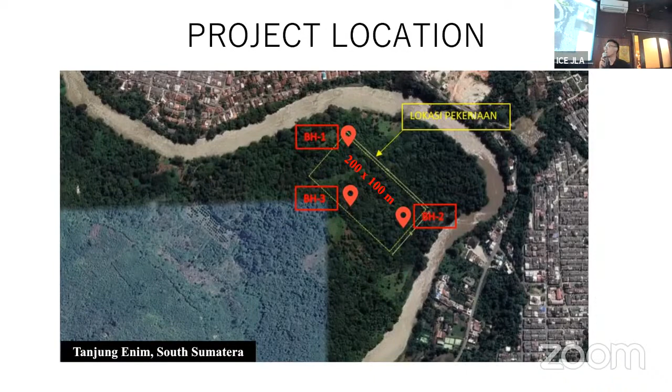For the introduction, the project location is at Tanjung Enim, South Sumatra, where the area of improvement is 200 by 100 meters. They gave us 3 boreholes with the NSPT value and some undisturbed samples down to a depth of 17 meters, as well as disturbed samples.

For the project requirements: first, we want to build an embankment of 2 meters, so the design level is 2 meters, and the whole stockpile itself will be 10 meters high.

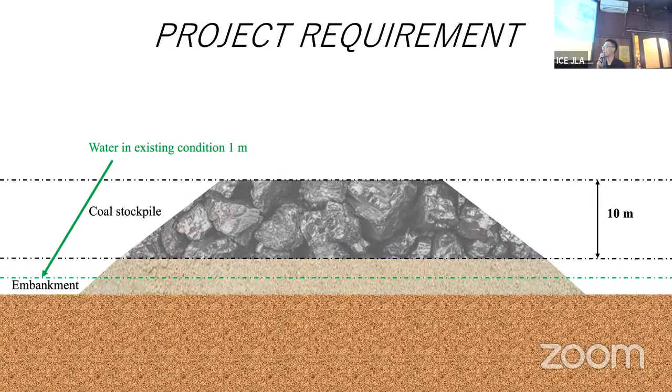So the total load from these two is going to be about 160 kilopascals, equivalent to 16-story buildings. In the existing condition, it's already submerged in water as deep as 1 meter, and in the flood condition, it can reach about 1.5 meters.

There are also other requirements such as the factor of safety. In the static condition, it has to be at least 1.5, and in the seismic condition, at least 1.1. Other than that, after we build the stockpile, the settlement limit is only 20 centimeters, which I think is the most challenging part in this competition.

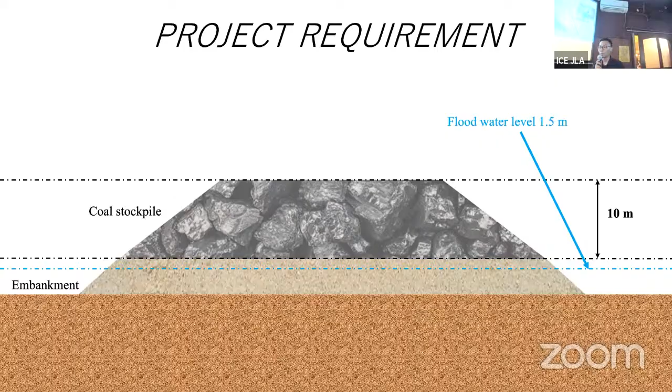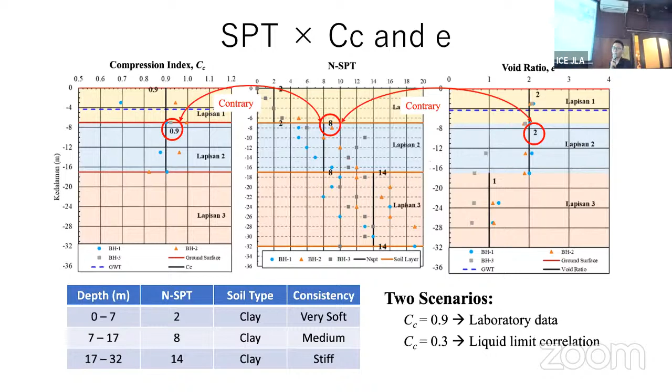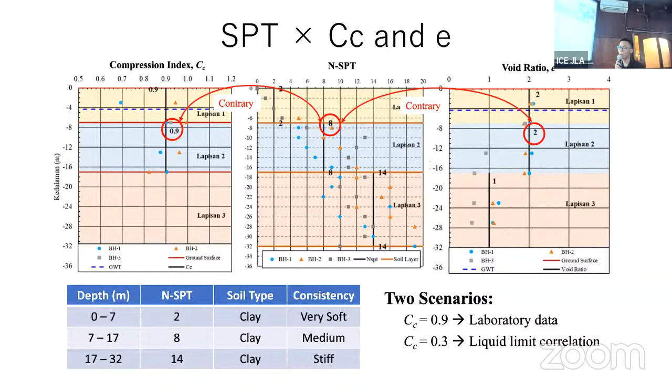So in the end, we designed 2 different scenarios. The first one uses the laboratory data, with a 0.9 compression index, and the other one is from liquid limit correlation, which has a lower compression index value. We want to show how soil data can really affect our design in the end.

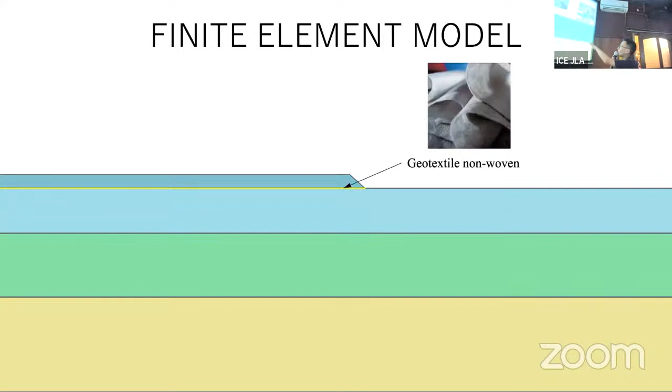Next, we model the design in the finite element program, which is PLAXIS. First, we have to define the soil layer, and then build the working platform, where we also lay out some geotextile nonwoven as a separation, and then we can install the prefabricated vertical drain to accelerate the consolidation time.

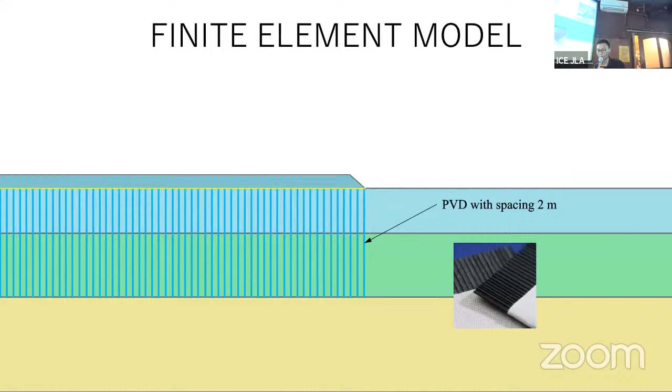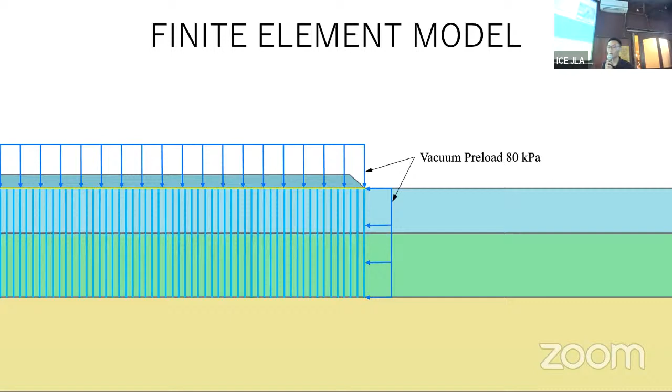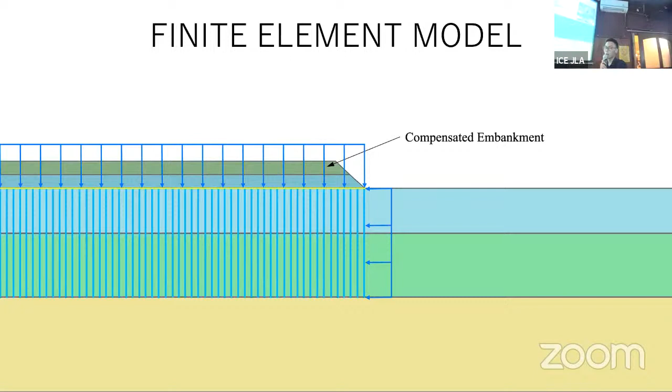And then we can also assign the vacuum preload, which in the ideal condition can reach about 80 kilopascals. This is the compensated embankment, because as we know, after we load the soil, the soil below will settle, so there will be some settlement that we have to compensate at the filling. And this is the preload.

Okay, so maybe before I continue, some of you already know what preload is, but for those who may not know, I will explain it a little bit. Preload means what it literally says - we want to load the soil before we build the permanent structure. Why? Because it actually relates to the behavior of the soil itself.

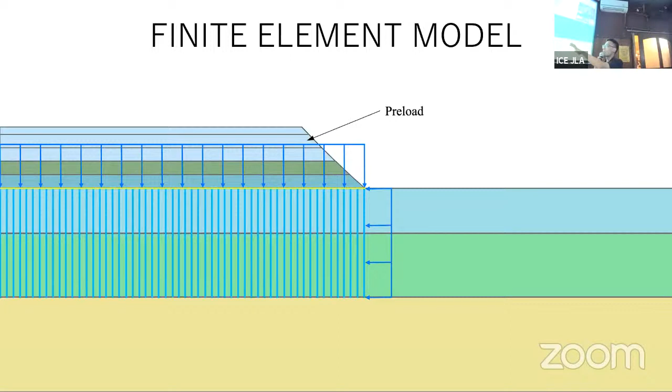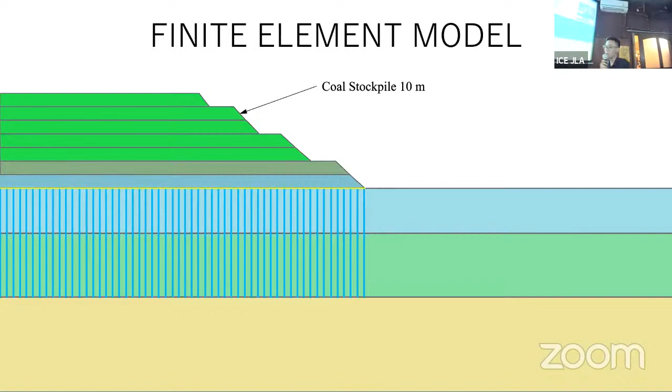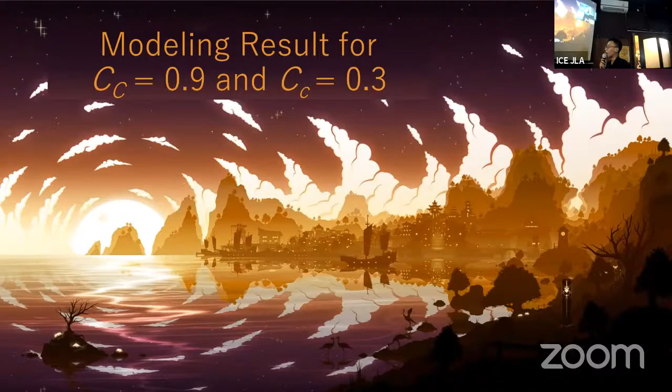But the load itself is temporary, so we will remove it at some point, and then we can build our permanent structure. This method works correlating with the consolidation of the soil, but I will not go deep into that due to the time limit. So I will just show you the model result, which I think you can really see clearly how the preload affects the design.

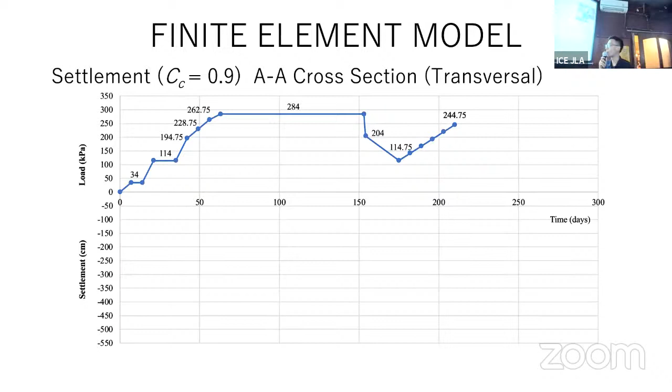So as you can see in the upper part, it's the load. In the first region, it's where we assign the preload and the vacuum, and then at the part where it's a straight line, it's the consolidation, which in this case we assign for 3 months. After the consolidation is done, we can deactivate the vacuum and cut the embankment. After that, we can build the coal stockpile, and we can see the settlement.

As you can see in the first part, the settlement is really high. After the consolidation is done, it reached about 5 meters. But after we remove it, it will rebound a bit, and then after we build the stockpile, the settlement will be minimal - as you can see, compared to that part, it's really low.

So it shows how preload really works to reduce our settlement in the permanent load. Other than that, from this method, we know that we also carry out some consolidation process, and consolidation is going to also increase our subgrade stability. Why? Because during the consolidation process, the excess pore pressure will be dissipated, hence it will increase our effective stress. Because our effective stress increases, our soil strength will also increase, which I think will be discussed more in the next session.

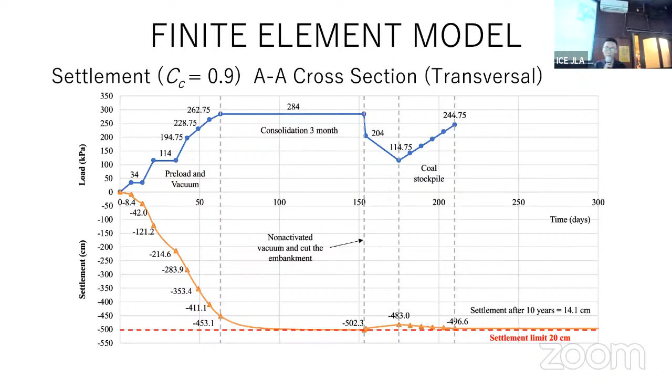So as we can see, after we build the coal stockpile, the settlement is only 14.1 centimeters.

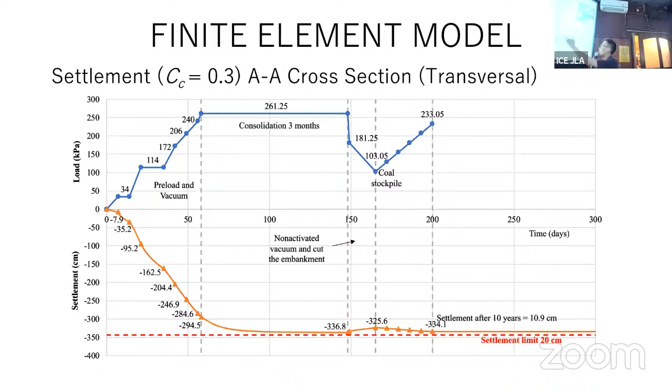This is for another cross section, because the area is 200 by 100 meters, so we model it into two different cross sections, since we just model it as a two-dimensional cross section. This is for the second scenario, where we are using the lower compression index value. This is for the next cross section.

So if we compare the two different scenarios, we can see that the settlement in the lower compression index will be lower. Other than that, the need for the preload height is also smaller, so the needs of the fill itself will be much smaller. We also have to remember that because the soil will settle, we have to compensate it somehow, and the compensating embankment in the lower compression index will also be smaller.

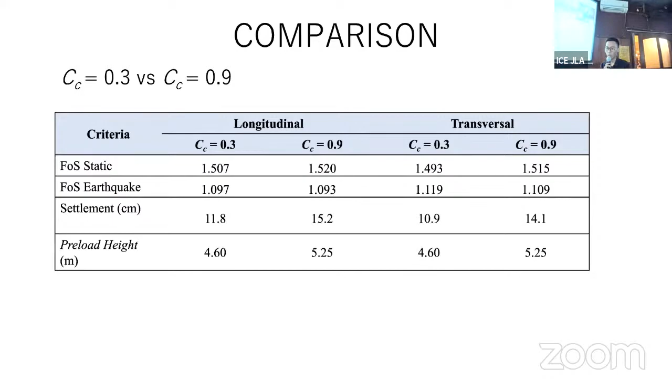So this shows how our soil data really affects our design, and shows the importance of it. Other than that, we also give some alternative options, which I think is our unique selling point that differentiates us from the other team.

In the alternative option, we also propose to use water as a replacement of the soil fill. It can be like this, but we only model it with the scenario with the compression index of 0.3.

But what's the consideration? Why do we want to do this? There are some considerations you can take. First, if the fill is hard to find - as you know, the need for preload height is quite a lot - if the soil for the fill is hard to find, it's going to cost a lot just to move the soil into the area.

Other than that, as we know, in the existing condition the area is already submerged in water. We can also use the water from the vacuum preloading process, because it will produce a lot of water, and then we can use it as a surcharge.

Other than that, of course, filling with water is a lot faster than using soil embankment, because with soil embankment we have to mobilize it and then compact it, so it will take a long time.

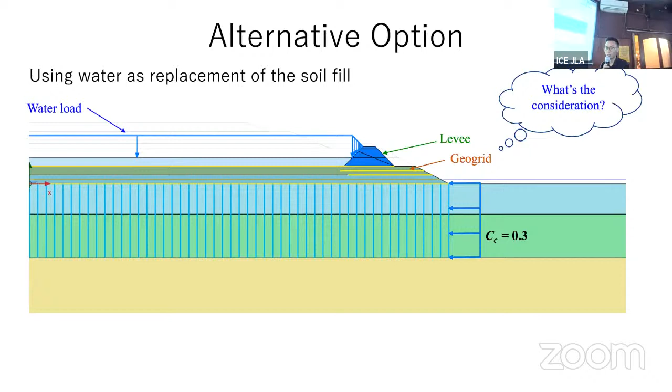Other than that, we can also use this as a temporary fish pond. But there are maybe some other considerations you have to take if you want to use it as a temporary fish pond - for example, who will really manage this thing? I don't know if they can really manage it if they have no experience before.

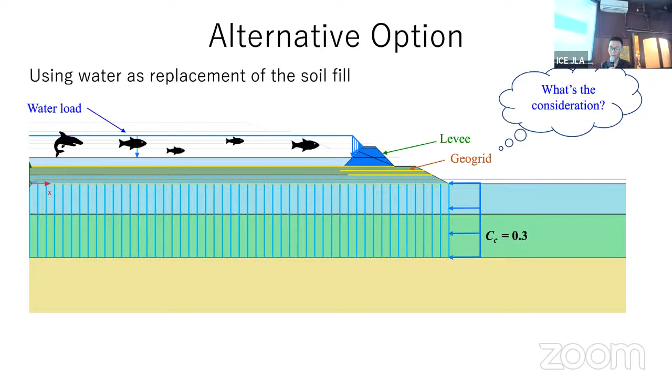But I think this is really a unique idea, isn't it? Because the consolidation time takes quite a long time, we actually can let the fish grow. So this is the real case from Geotech Indo, where they used seawater as the surcharge for the preloading.

So for the conclusion of this presentation: first, based on the soil test data, we can see that there is soft clay in the subgrade soil. The recommendation for the improvement method is the combination of soil and vacuum preloading, and the consolidation process is accelerated by using PVD. The PVD is installed in a square pattern with spacing of 1.8 meters and a depth of 17 meters.

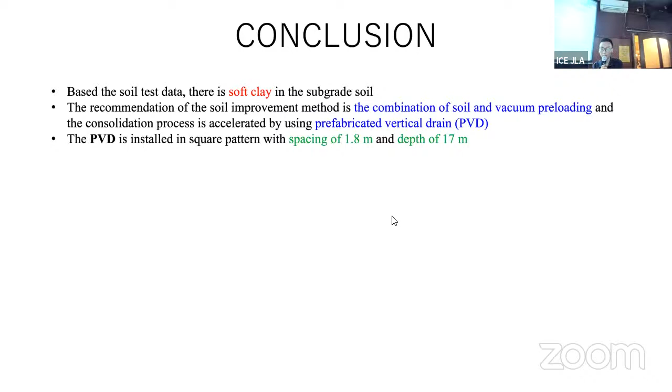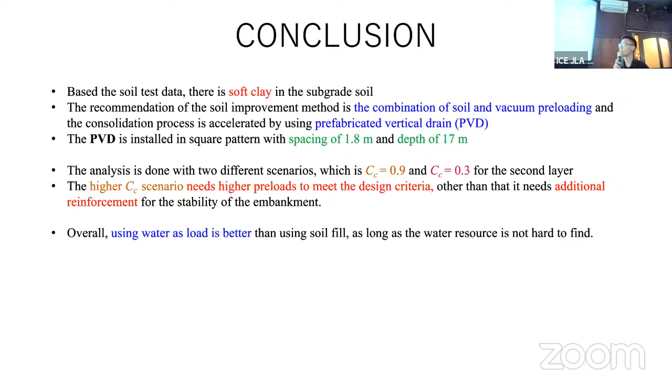The analysis was done in two scenarios where the higher Cc scenarios need higher preloads to meet the design criteria, and it also needs additional reinforcement for the stability of the embankment. Overall, using water as load is better than using soil, as long as the water resource is not hard to find. Okay, that's all from me. Thank you.

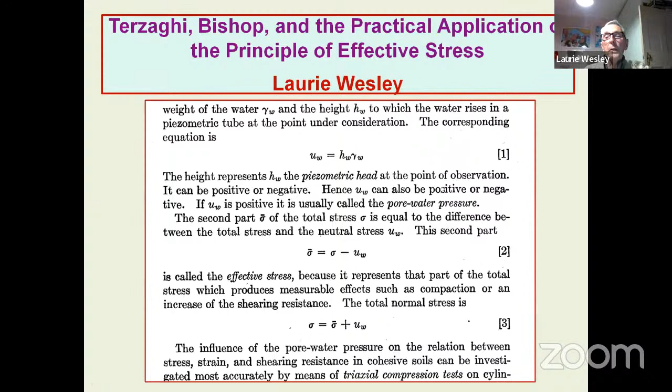So let's get back to this. The first part is a little bit about the history, and then I'll move on more to how you apply the principle of effective stress in practice. I'll just keep moving on here. Now, I can't quite see the top of mine here—I might just have to move a bar up or something. Let me have a look.

Ah, yeah, that's better. Yeah.

Karl Terzaghi is the undisputed founder, the father of modern soil mechanics. I should explain too, the reason soil mechanics grew very late in the day was because the people studying it knew how concrete, wood, and steel behaved, and they were expecting similar behavior from soil, but it never seemed to work.

It wasn't until Terzaghi pointed out that when you apply stress to soil, that load is going to be shared between either the soil skeleton and the water in the pore space, or one on its own. Whatever analysis you're attempting, you have to understand that when you apply a stress or load to soil, the load is shared, or is likely to be shared, between the soil particles and the water.

That was Terzaghi's great contribution, really, finding that out and putting it into writing in his earliest book and his later book. His first book was in 1925, and that's generally regarded as the start of modern soil mechanics, written in German.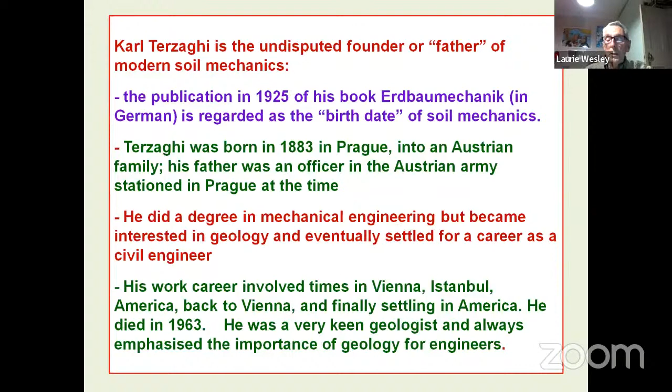He was a very keen geologist, and he always emphasized the importance of geology for engineers. Terzaghi discovered and explained that when a force, pressure, or stress is applied to a soil, it will normally be resisted by both the soil particles and the water that occupies the space between the particles.

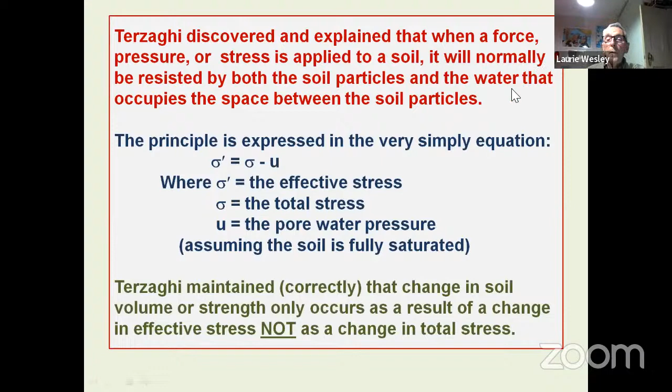He expressed that principle in the very simple equation that effective stress is what is important, and it is the difference between the total stress and the pore pressure. Terzaghi maintained correctly that change in soil volume or strength only occurs as a result of a change in effective stress, not as a change in total stress.

In relation to the shear strength of soils, Terzaghi adopted the basic equation that Coulomb had put forward for the shear strength of soil: tau equals C plus sigma tan phi. Coulomb's work was really entirely to do with dry sand, so in that sense there is no mystery about the equation as it is.

Coulomb assumed that the value of sigma was the direct normal stress on the soil and that the soil behaved like a dry sand. He was unaware of any issues influencing this assumption. Terzaghi recognized that the value of sigma could be either total or effective stress, and he also understood the best way to investigate how soil responded to applied stresses was by undertaking triaxial tests.

That's because he was able to control both the applied normal load or confining load, as well as recording what was happening with the pore pressure. However, Terzaghi did not get as far as establishing a sound theoretical basis for applying the above equation and the results of triaxial tests to practical situations.

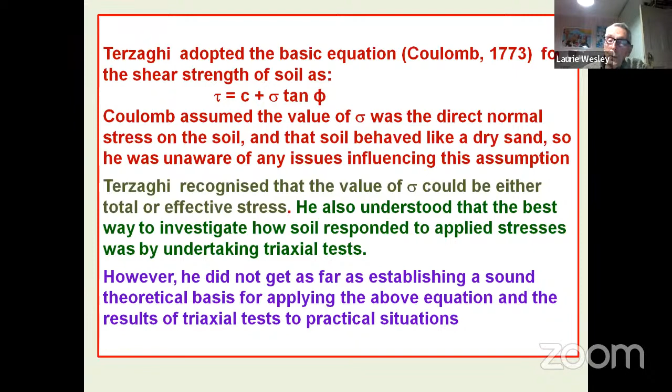This is where Bishop comes along. This is a quote from his book that was well known at the time, Theoretical Soil Mechanics: 'For these reasons, the data required for making a stability computation pertaining to clays can at present be obtained only by means of following a purely empirical procedure.'

You test the clay in the laboratory under conditions of pressure and drainage similar to those which would be in the field under shear failure, and we introduce the values of C and phi that you get from that into our equations. And then he states it is obvious that the success of this procedure depends chiefly on the degree to which the experimenter has succeeded in imitating the field conditions.

So Terzaghi established the principle of effective stress, but he failed to arrive at a rigorous method for applying it to the analysis of stability situations.

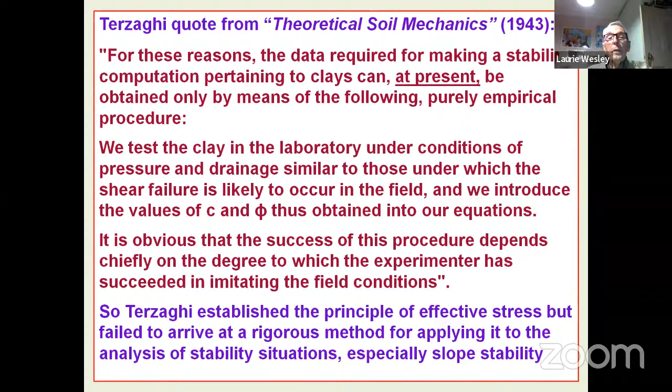That book came out in 1943 with that statement. That was the year Bishop began his career with the London Metropolitan Water Board. At the time, he had to read Terzaghi's book and the proceedings of the first international conference, plus one or two other papers published in American journals. So the literature was very limited, but no doubt he studied and got himself up to speed with it very quickly, and he would have come across Terzaghi's statement. That must have been the seed that led him to spend most of his early years investigating the principle of effective stress and how it should be applied to practical situations in the field. Terzaghi's achievements were the result of unrelenting examination of how soils behave.

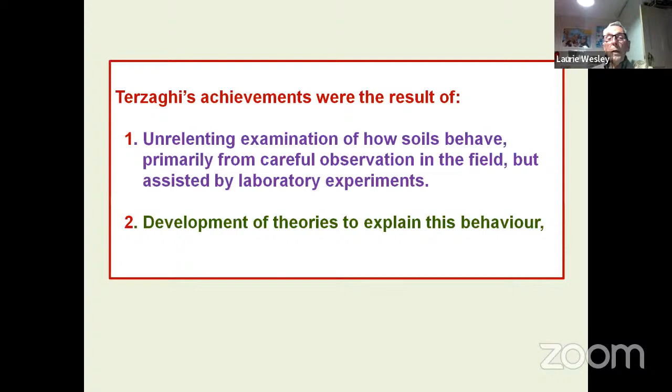Primarily from careful observations in the field, but assisted by laboratory experiments, and then development of theories to explain this behavior. Terzaghi's book, Theoretical Soil Mechanics, published in 1943, has been quite significant.

Alan Bishop joined the Metropolitan Water Board and worked closely with the soil mechanics group at the British Building Research Station, where Skempton had been employed for the specific purpose of developing soil mechanics. Bishop, in effect, was seconded or worked with the Building Research Station in the early years of his time with the Water Board. That's Bishop on the right.

The photo on the left is the Chingford Reservoir today. A very large slip occurred down in this bottom western, or right-hand, corner here. A massive slip occurred during its construction, which set it back many years, and the investigation into what caused it and what they could do about it was very thorough. They called Terzaghi over to report on it. When I visited the London Metropolitan, they gave me a copy of Terzaghi's report on the failure of the Chingford Dam and the investigations into it. It was all pretty straightforward, common sense really.

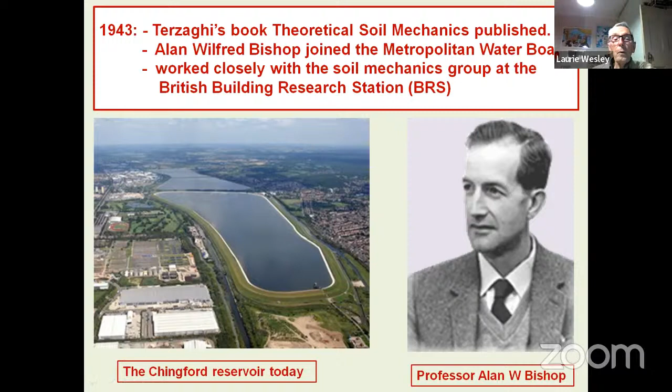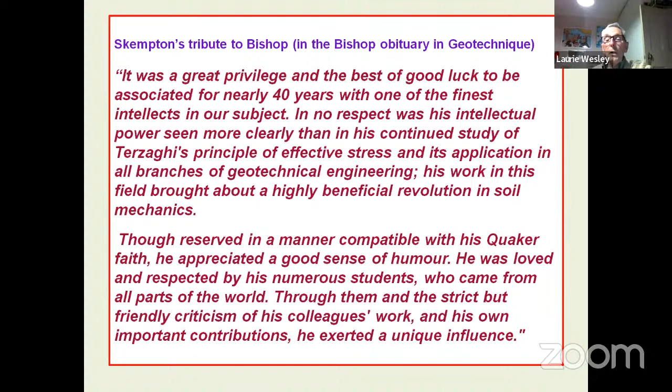Skempton's tribute to Bishop in the Bishop obituary in Geotechnique is very nice - it was an addition to Skinner, who wrote the real obituary when Bishop died. This is what Skempton said: 'It was a great privilege and the best of good luck to be associated for nearly 40 years with one of the finest intellects in our subject. In no respect was his intellectual power seen more clearly than in his continued study of Terzaghi's principle of effective stress and its application to all branches of geotechnical engineering. His work in this field brought about a highly beneficial revolution in soil mechanics. Although reserved in a manner compatible with his Quaker faith, he appreciated a good sense of humor. He was loved and respected by his numerous students who came from all parts of the world. Through them, and the strict but friendly criticism of his colleagues' work, and his own important contributions, he exerted a unique influence.'

These are the important dates. There's the failure of the Chingford Dam, which is regarded generally as the birth of soil mechanics in Britain. The first international conference had been held earlier, in 1936, organized by Terzaghi, who did it with two objectives: first, to have the conference, and secondly to introduce his work to a much wider audience than he was currently communicating with. So that's where Bishop starts his job, in 1943, during the war years, when Terzaghi's book Theoretical Soil Mechanics was published.

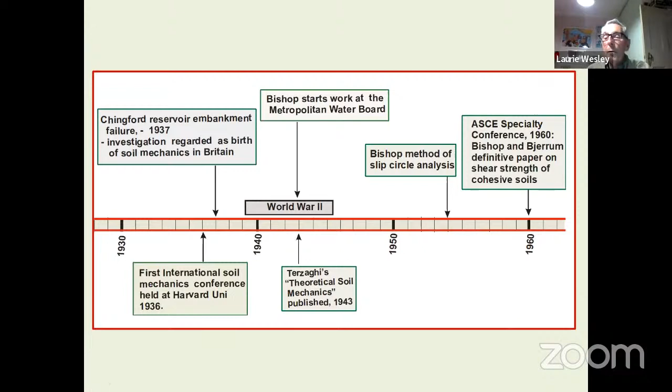In 1955, Bishop published his paper on his slip circle method of analysis. But the more important paper, where he settled the issue of how you apply the results of triaxial tests to stability estimates, was at that conference there. I'll perhaps refer to it again later, but that settled clearly the way the results should be used.

Major slip in 1937. Bishop, in 1943, joined a small soil mechanics group at the BRS, which was responsible for investigating the cause of the failure of the Chingford Reservoir. It also worked on modifications to the design of a second reservoir, taking account of lessons from the Chingford failure. That's where Bishop really started to make his mark, in the design of earth embankments, or earth dams if you like, used for creating storage lakes in London. So Bishop faced the issue left unresolved by Terzaghi - a rational way of using the results of triaxial tests for analyzing practical stability situations.

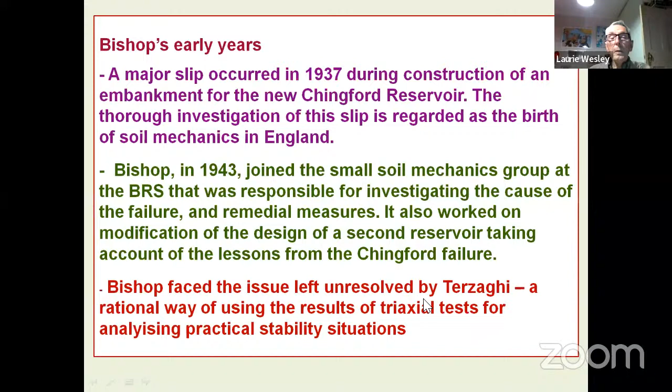Bishop was the ideal person to take up this challenge for several reasons. He was a very practical man. When I was reading the Imperial College archives to write the Bishop biography, I came across a letter which Bishop had written to ICE as support for gaining membership. In his letter, he gives an account that he took practical courses at Cambridge University, which was a nice continuation of the work he had been doing in his own workshop at home. So he was obviously into workshops from his early teenage years, which is why it was not surprising that he was a brilliant designer of apparatus.

His first job made him realize how important the issue of soil shear strength was for the safe design of reservoir embankments, and he was fascinated by Terzaghi's effective stress concept. He couldn't quite believe it was as simple as that, and he looked into the effect of particle area contacts and things like that. But in the end, he performed all the experiments he wanted to make sure it applied for all ranges of pressures. Bishop had a very sharp mind for the development of theory, and he was able to design and construct whatever testing equipment was needed to address the issue.

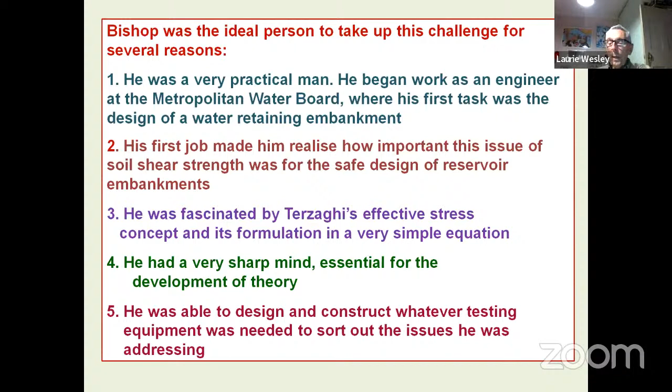And I think I now come on to having a visit to look at his first triaxial apparatus. A note on the Bishop method.

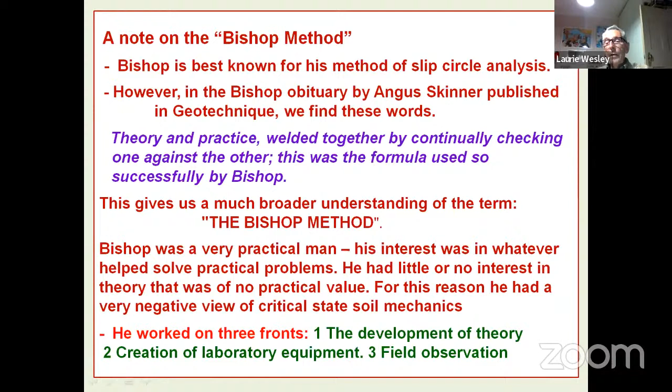Bishop is best known for his method of slip circle analysis. However, in the Bishop obituary by Angus Skinner, we find these words: theory and practice welded together by continually checking one against the other. This was the formula used so successfully by Bishop. So this gives us a much broader understanding of the term the Bishop method. If it had only applied to the method of slope stability he analyzed, they probably would not have used that as the title of the biography I wrote. The Bishop method was very specific, as Skinner outlined: he worked on three fronts - the development of theory, the creation of laboratory equipment, and field observation.

Now look here, I went there to have a look at Bishop's triaxial apparatus, and who should be standing right beside it? There he is. That wasn't quite the truth.

Mike was very helpful to me while I was in London, and he took me to visit both Bishop's first triaxial apparatus and the first dam that Bishop wrote about. So many thanks for that, Mike. There was a great connection - Mike just happened to be in London when I was there reading the Bishop archives.

Bishop's first triaxial apparatus, built between 1943 and 1946 at the Metropolitan Water Board. It was a very clever apparatus - you may have heard the description of it that Mark Swen from Tensor gave a while back, with its special features. He did a very nice presentation. One feature was the rotating bush at the top so there was no friction between the ramrod going down, and a very clever system for mechanical recording of graphs, which you could just see down below there on the right at the bottom.

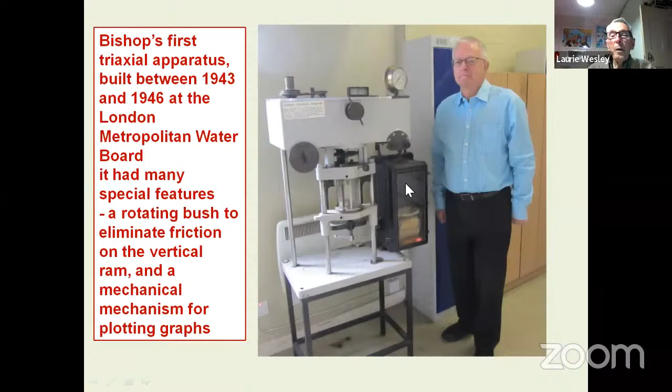And I had to put this in because I spent 3 years under Bishop doing a PhD. In fact, I went to Imperial College very determined I wasn't going to design apparatus and use up most of my PhD time without having any left for experimental work. But I looked at the equipment they had there, and it was fairly clear the only way to do what I needed was controlled stress application, not controlled displacement, which is the usual way. The only way you can do controlled stress application, at least in those days, was by a hydraulic system where somebody could control the hydraulic pressures.

So in the end, I had to design an apparatus, and I tried a few designs which I didn't like much, with the conventional way of applying a load from the top. Then I thought, well, maybe I should try putting a cell right down at the bottom with a linear bearing going up and putting the sample on top of it. And I took it to Bishop, and he said, 'Oh yeah, it looks pretty good, Laurie.'

"Just give me a night to have a look at it, and I'll let you know in the morning." In the morning, he came in and said, "Yeah, looks very good, Laurie. Draw it up and let's get one made and see if it works all right." So that's how that came into being.

When I produced some rather tidy results, Bishop and I wrote a joint paper and got it published in Geotechnique, and the thing has been manufactured ever since. Currently it's manufactured by GDS Instruments. It's been enlarged and altered in various ways, but it's still marketed as the Bishop Wesley triaxial cell.

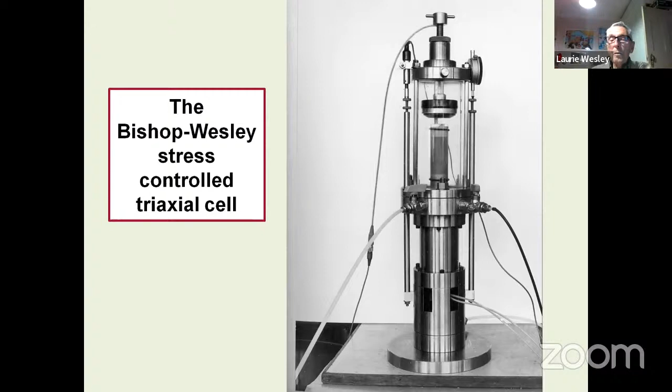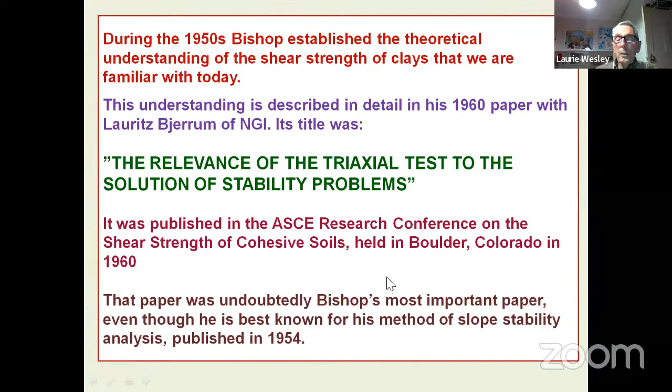Now this is the paper I was referring to, published in 1960: The Relevance of the Triaxial Test to the Solution of Stability Problems. It was published in the proceedings of a research conference held in Boulder, Colorado, in 1960. That paper was undoubtedly Bishop's most important paper, even though he's best known for his method of slope stability analysis, published around 1954 or 55.

When I went to university we were being taught things like C with a suffix CU, from a consolidated undrained test, and then you'd have a phi from a D test and a phi from a U test. We taught that, but we didn't really understand it. This was in the 1950s, about the time Bishop was sorting out how to do triaxial tests and apply them. So it was only after I went to do the Imperial College one-year master's degree in 1964 that I really learned the basics of soil mechanics with respect to shear strength.

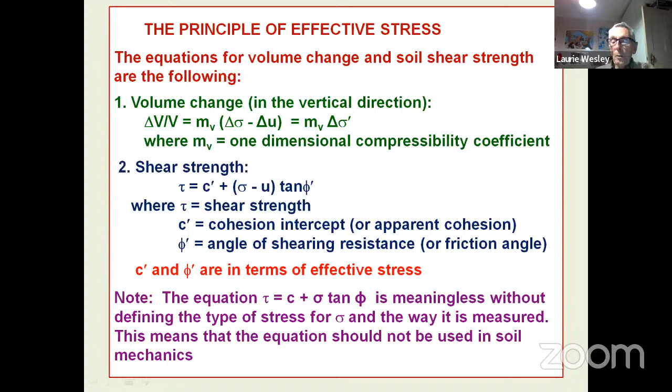The shear strength determined using the above equation is the strength in terms of effective stress. In other words, it establishes the parameters you put into that formula. To use the equation, it's necessary to know the value of the soil parameters C and phi, and the pore pressure U.

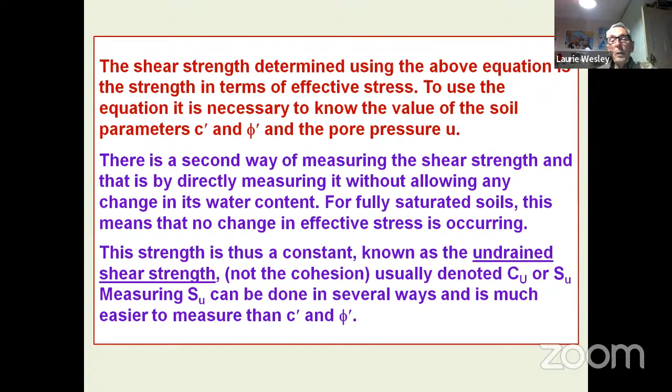That's the first and probably most fundamental way of measuring soil shear strength. But there is a second way: directly measuring it without allowing any change in water content. For fully saturated soils, this means no change in effective stress is occurring. If the sample is fully saturated and undrained, the effective stress can't change. This strength is thus constant, known as the undrained shear strength - not the cohesion, though some people still use that term - usually denoted as CU or SU. Measuring SU can be done in several ways and, as you well know, is much easier than measuring the effective stress parameters C and phi.

It's sometimes said in textbooks or lectures that this is a property of clays. It's got nothing to do with clays at all. The identical result will be provided on two conditions: first, the soil sample is fully saturated, and second, the test is undrained. The same result is obtained from clay or sand. However, the undrained strength SU is only of practical relevance in the case of clay - it's very rarely of relevance with regard to sand.

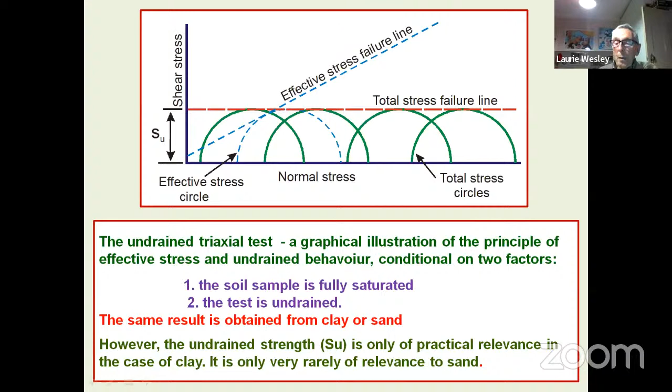Bishop established that the geotechnical engineer normally has the choice of two methods for analyzing the stability situation: an undrained or total stress analysis based on the undrained shear strength, SU. Skempton always called it a phi equals zero method, which was an easy way of explaining it, whereas Bishop used the more correct technical term of an undrained analysis or an undrained test, or the analysis in terms of effective stresses.

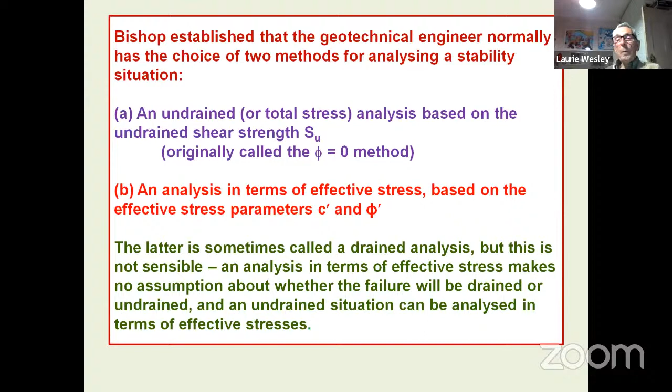So that's the choice you've got: an undrained analysis based on the undrained shear strength, or an analysis in terms of effective stress based on the effective stress parameters C and phi. The latter, in contrast to an undrained test, is called a drained analysis. But this is not sensible at all. An analysis in terms of effective stress makes no assumption about whether the failure will be drained or undrained. In fact, an undrained situation can be analysed in terms of effective stress. You just have to know what the pore pressure is. So calling it a drained analysis rather than an analysis in terms of effective stresses is not sensible.

Bishop also stated that for most stability situations, there are two cases to consider: the end of construction or immediate case. Stability in this case can be estimated using a total stress analysis based on the assumption that the clay is of very low permeability and the undrained strength does not change during construction. And then there's the long-term case. Bishop, of course, was thinking particularly of cuttings in England, cuttings in the very low permeability London clay, and their stability or lack thereof was an early focus of the geotechnical people in the early development of soil mechanics.

It was a puzzle why some of these cuttings failed after they'd been stable for 10 or 20 years, and it was a puzzle for many years just exactly what was going on there. But anyhow, this is what Bishop was talking about, the long-term case, which applies when sufficient time has passed for pore pressures to reach their equilibrium steady state.

Stability in this case is normally determined using an effective stress analysis. But there are cases where a total stress analysis may be appropriate, taking into account the change in the undrained strength that may have occurred. But I think we would probably all agree that for a long-term case in cuttings in low permeability clays, we need to do an effective stress analysis.

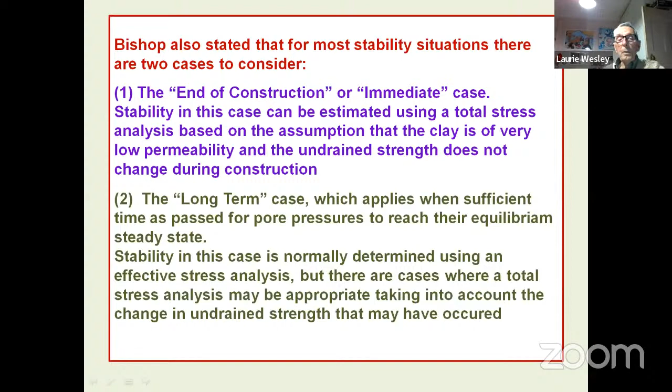This is just to sum up, in a simple way, why you use undrained strength in one situation and an effective stress analysis in another. Say we've got a clay and we're doing something with it. The first thing we could do is to build a structure on it. If you do that, the load is taken either by the soil particles or the pore water. If it was a raft situation like this, initially it would be mostly taken by the pore water.

Because it would take quite a long time for the water to seep out, particularly in low permeability clays like London clay, you're perfectly safe if you base your estimate of foundation pressure on the undrained shear strength. You're going to gain in strength with time, and your basis for estimating bearing capacity, in other words using the undrained shear strength, is perfectly valid and safe.

But the opposite is the case when you make an excavation. If you remove all of this load from the soil below by excavation, then you're going to induce the reverse of what happens here. Here you would induce positive pore pressures; here you will induce negative pore pressures, and the water will start to flow towards the excavation, and the soil will become steadily softer.

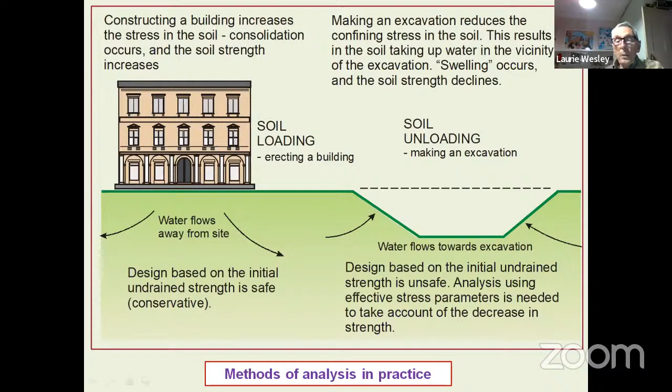So I think for estimating the long-term stability of slopes of this sort, you've got little choice but to use an effective stress analysis. For made soil slopes, such as cut slopes in original ground or embankment slopes of compacted soil, it's generally necessary to make two estimates of stability: the situation at the end of construction, and the long-term situation. The estimates are likely to be different because the pore pressure state will probably change with time and thus produce different values of safety factor.

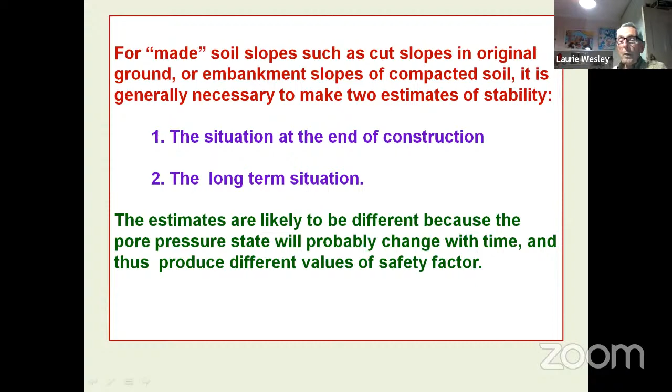Just be clear on one thing: soil will behave in an undrained state in either of the following situations. Water is unable to flow in and out of the soil because all of the boundaries are impermeable, as for example an undrained triaxial test, or when the soil permeability is very low and the loads or stresses are applied fairly rapidly, as for example when an excavation is made rapidly, or a storage tank is filled quickly with water.

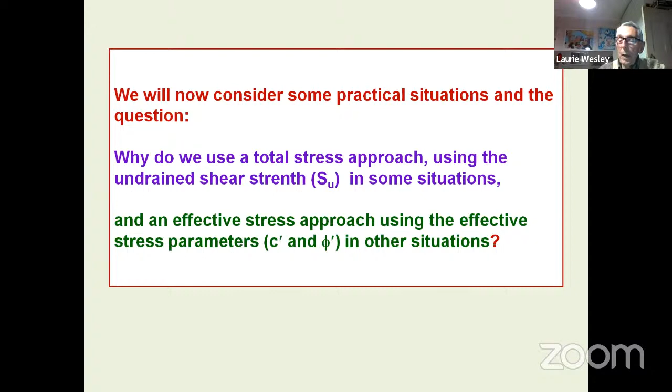In many clays, particularly clays with permeability as low as London clay, the soil will behave in an undrained fashion or undrained state. We will consider some practical situations and the question of why we use a total stress approach with undrained strength in some situations, and an effective stress approach with effective stress parameters in other situations. I believe I've already explained why these two ways of analyzing things apply sometimes undrained and sometimes in terms of effective stresses.

Another case is building a compacted embankment on soft clay underneath. You could do the same with this, but not with the material underneath if it's soft clay - you'll have to do a slip circle analysis that passes through the compacted material. This is most likely a fairly granular material, so you'll need to make some assumption about the phi value for it, and use the undrained strength for the part below.

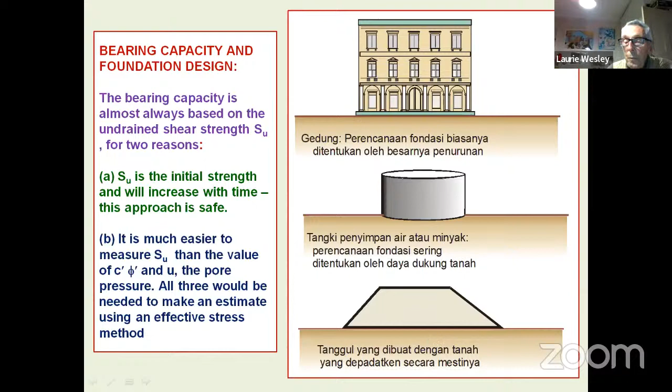You're quite familiar with this, so I don't need to emphasize it, but the stability of natural slopes is always done using an effective stress analysis. I should make this very clear, and I haven't done so in this presentation: my view is that with natural slopes, particularly in residual soils, the variability of the material is so great that you're really wasting your time trying to apply slip circle analysis or any analytical methods to them.

Your best guide is firstly visual inspection of the slope to check what it looks like - if it's got odd bits and pieces throughout, you can tell whether it's likely to have had slips in the past. I've been writing about estimates of stability and the usefulness of analytical methods, and I looked up a couple of textbooks, Das and Budhu I think. They make clear statements that applying analytical methods to natural soils is fraught with many uncertainties because of the variability of the geology and soil conditions. Budhu also warns that applying analytical methods to natural hillsides is fraught with difficulty. So always bear that in mind.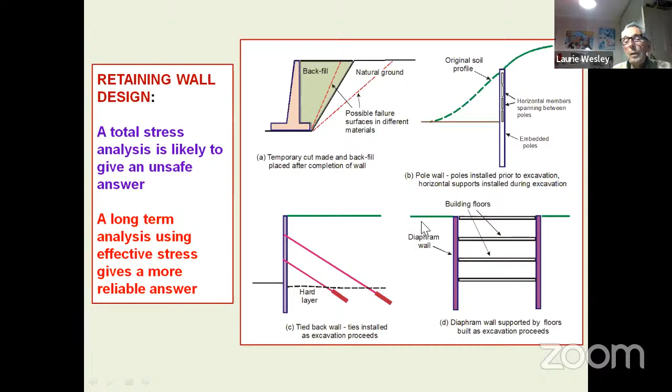Here, I forgot I had this - a compacted embankment on soft clay. If the embankment is made of granular material, the analysis should use in the clay layer the undrained strength, and in the sand layer the effective stress friction angle. If the embankment is made of clay, then the analysis should use both materials, and staged construction is necessary to allow time for consolidation.

This last point is important, people. It is often necessary if you are building a fairly thick embankment, or even placing a layer right across the site - it will always have edges. And if there's any need to allow for an increase in the undrained shear strength so that you can proceed with the next layer, I don't think it is wise or practical to rely on measurements of settlement as assurance that you have gained the increase in undrained strength that you need to make the thing stable.

You might even think that by measuring the pore pressures and finding that the pore pressure dissipation is sufficient, you've ensured that you've got the gain in strength. My view is you should do a CPT test. The simplest thing to do would be to do a CPT test down through here before you build the embankment, and then put your embankment in place, and then do another CPT test. I know it's a bit inconvenient.

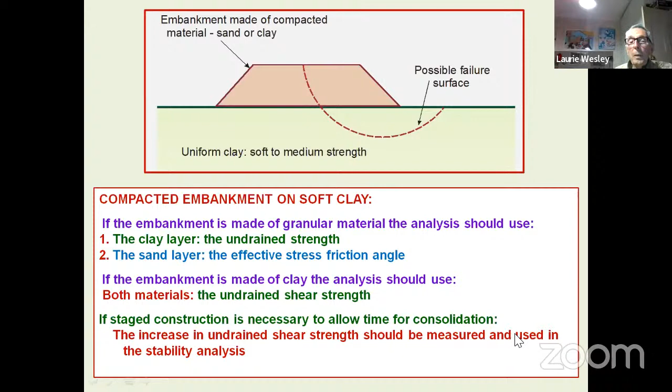Yes, moving on from that. Oh, a question: should both methods give the same answer, i.e. the same safety factor when used in slope stability estimates? If the answers are different, which gives the correct answer?

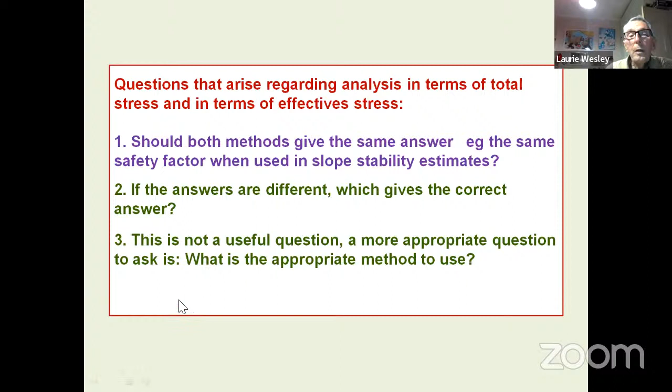I don't think it's a particularly useful question. The more appropriate question is to ask what is the appropriate method to use, rather than those questions above. If you're using the appropriate method, you will know your safety factors are to be trusted, rather than trying to do it by one method and another and guessing which one gives the right answer. Now I want to explain, as best I can, why they don't give the same answer - Bishop said they will give the same answer only if your safety factor is unity in the case of a vertical cutting.

But let's have a look here. This is in the field. We can imagine we're investigating the possible slip on a plane somewhere here. We can do measurements in some way, and we know what the total stress is, and we know what the pore pressure is. So we can work along the bottom down here, and we can do measurements to establish the Mohr-Coulomb line, but we can put in our total stress and our value of pore pressure, and then read this off here as the strength, and shoot this line up to here, and read that value off as the undrained strength, because we've done the test undrained and measured the pore pressure.

But that does not take account of the fact that when we do our triaxial test undrained, we are inevitably going to either raise or lower the pore pressure. In other words, to get the true undrained strength, we would have to know what the pore pressure change was during the test and put it in there, and we would come up with the true value of the undrained shear strength. So that is one attempt to explain why they give a different answer.

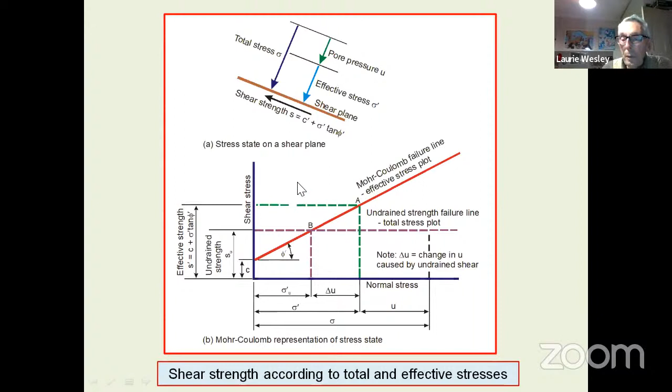At a more practical level, just think about doing an analysis of an embankment on a solid foundation here, and we end up with this red line - this is the circle we have analyzed. These graphs here are only graphs of the value of shear strength. If we were doing an undrained analysis, we would probably use the same value all the way around, so that green line would be the value of undrained shear strength. If we were doing an effective stress analysis, because the effective stress down near the toe here is quite low, and very low up here, we would have very little strength here, and our line would come around like that. So clearly that's going to give us, or we cannot expect that to give us the same answer.

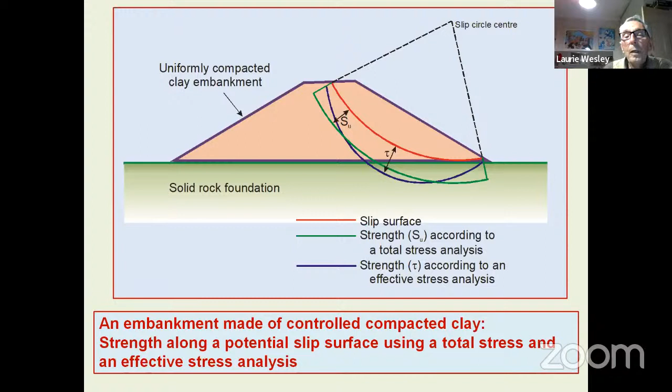So that's another one of my attempts to explain why the two systems give you different answers.

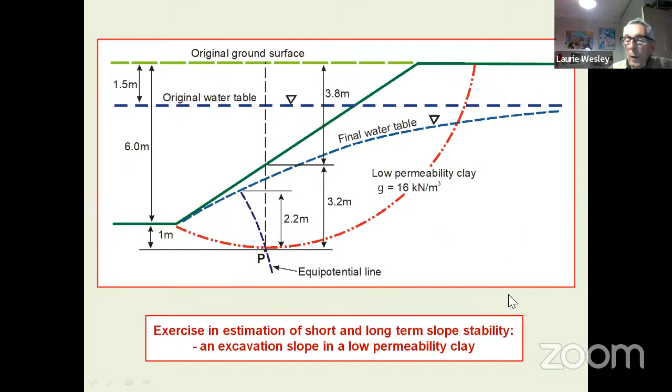And it's possible to plot the results in this way. This one at the top is looking at a particular element somewhere down at the bottom, somewhere down on the slip circle, just looking at a particular element. So this is looking at the total vertical stress. So we're unloading

But from that point onwards, water is going to start to flow towards the cutting, and that means your pore pressures are rising and your effective stress is lowering. So coming down here, this is what the pore pressure does. This line here is parallel to the line at the surface, and then the pore pressure starts to rise from that point onwards. And in keeping with that, your safety factor is going to fall when you make the cutting.

That's just because of the change in the geometry. And from that point onwards, it will continue to decline further and eventually rise to some equilibrium values. So that line there was simply the mirror reflection of that line there, this being the change in safety factor and that being the change in pore pressure.

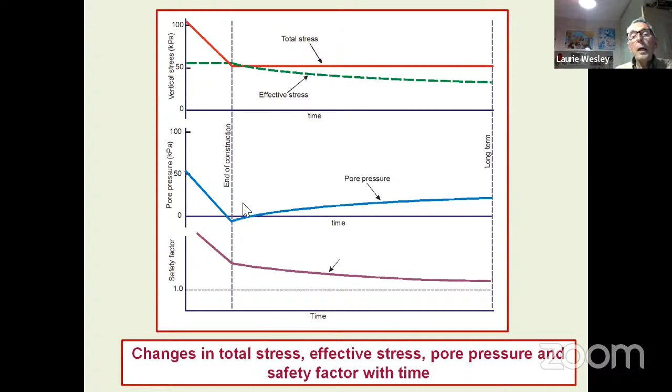But if we're talking about residual soils, then actually you could well have pore pressure changes taking place as you make the excavation, because they're much more permeable than low permeability clays. So you're going to have something more like this: you make your excavation and you're not going to have a nice tidy pore pressure system.

You're going to have a wavy line reflecting the seasons, the wet seasons and the dry seasons, and interspersed with those you're going to have sudden storm events which push the pore water up.

I was just looking at the time. And we know from our own experience, the seasonal changes in pore pressure have taken place for so long that they're not the current cause. If you're going to have failures in residual soils, they'll almost invariably be as the result of short-term, very intense rainstorms. That's why I put these little bubbles in here.

Those are the pore pressure rises. So coming down to here, we're looking at our effective stresses. Your pore pressure goes up, your effective stress suddenly drops, likely to cause a failure, and your safety factor will wander along down that.

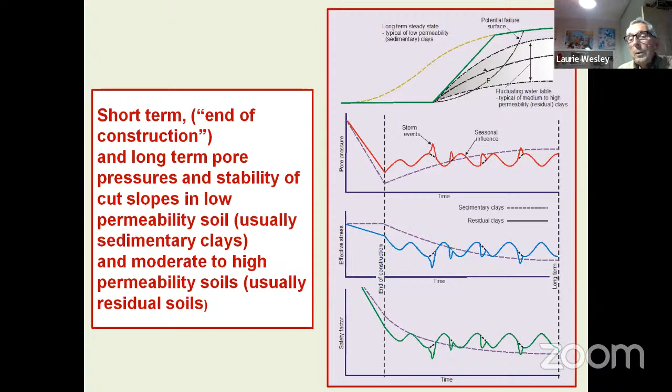So what I've said here is short-term end of construction and long-term pore pressures and stability of cut slopes in low permeability soils and moderate to high permeability soils. Yeah, so the first one was the high permeability soils, and these ones are the low permeability. And I think I must be getting towards the close.

Going back a little while, I did my PhD between '72 and '75, and I and my mate Richard Pugh were the last two full-time students of Bishop's, because he had a bad heart, and he always was a rather anxious person.

The doctors had Bishop on pills to calm the nerves, but they didn't realize that if you took them the way Bishop did for a long time, they started to produce the opposite effects of what they were supposed to cure. So Bishop was starting to have a mental breakdown just towards the end of my PhD. I wasn't aware of that at the time, but when I heard later that he'd had a breakdown, it did make me think. He took an interest in my work, but not as much as I would have expected. It was rather interesting. I had my oral exam.